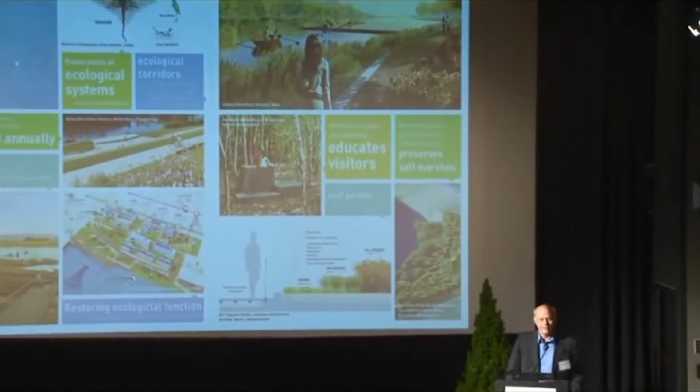Looking at climate, we work all over the world, so climate becomes an initial point of reference for us - how do we respond to the various climates within which we work, and what are appropriate solutions for those climates? Ecology, again, because the sites vary and the scale can be vast, several square kilometers down to a few hundred square meters. The issue becomes how does one deal as part of a broader context? We have this notion of always embracing that next level of context in the work.

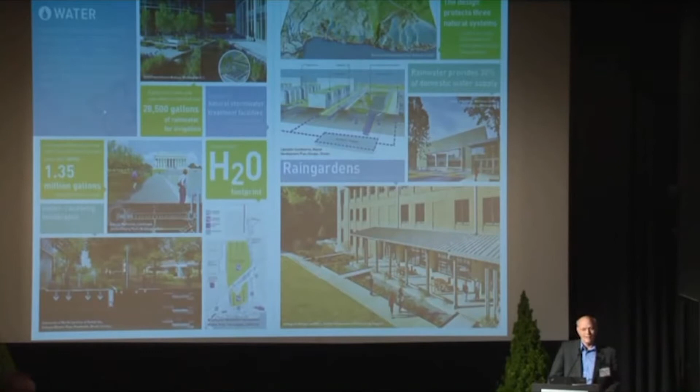Water - again, depending on where you're working, what are the water issues in the region? What are the key metrics one would look at? How does one produce a design that is appropriate for the water issues in that particular region?

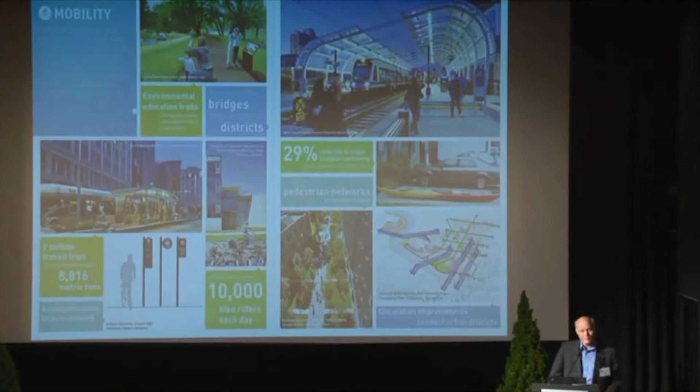Mobility - because we come from a planning background, we are dealing with transportation. We like to refer to transportation not just as moving cars around, but how does one walk, bike, use transit, and how does one even embrace the car? How does that function as a system, and what are some of the outcomes we seek to achieve? Focusing on the experience for people becomes part of the key initiative there.

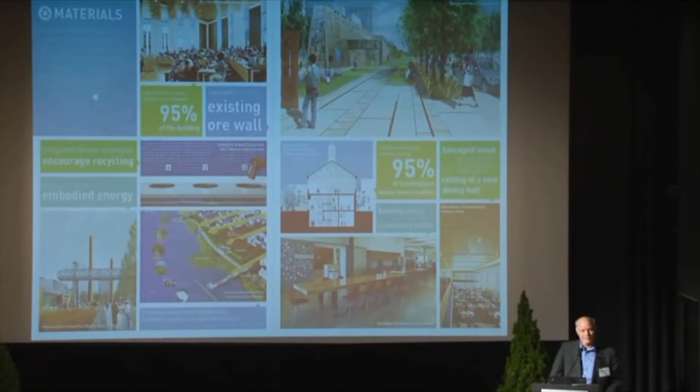Looking at materials - how do we source materials? Where do they come from? Are they appropriate for the region? Do they perform well in the climate? Do they perform well in an interiors project, which again we work at that scale as well. So we're trying to look at materials on a comprehensive basis.

And then finally, community - it's about people ultimately. So how do you create places for people, places that are culturally responsive? Again, looking at where you're designing, who you're designing for, and what might be their particular issues.

So how does one apply the framework? What I've shown you is the overview and a flash of some of the metrics that we've been trying to work with.

An example from a university environment—in many cases we work with urban universities. A university environment provides the opportunity to deal with many of the issues you deal with at the urban scale, but importantly, there's one owner.

So you're able to address these issues more comprehensively than perhaps you would at a city scale. The Sustainable Solutions Framework applied for an urban university might look something like this, where we begin with people. Who are we serving? How many of them are there? And what might be the impact on the environment?

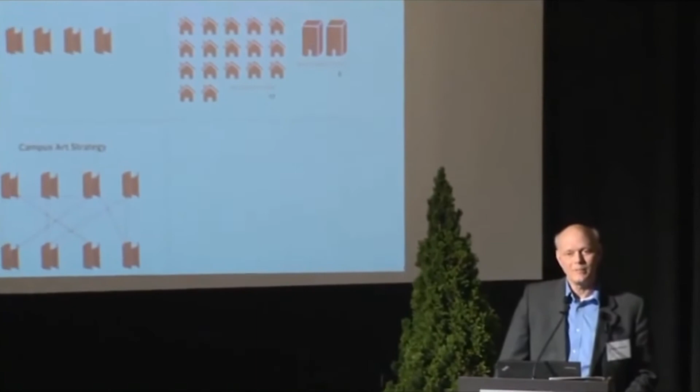What is the mission of that population? What are they trying to do as an institution? How does that impact the environment, and how does it impact the way they organize themselves? For example, if they're pushing research, that becomes a key initiative.

With many institutions, land use and athletics become an important consideration. Also place, tradition, history, and what sense of community they're trying to develop in that environment.

The issues you would expect us to get into are all the environmental factors we deal with in our work, whether land use, landscape, space implications, et cetera. In the framework we seek to develop a goal for each area, conduct appropriate analysis to inform how we look at these issues, and then set metrics for various time frames. Where are we today, and where do we hope to be in, say, 10 years' time?

So the element of time becomes a key consideration in how one looks to the future, and how one brings a population along through this process to help them understand that if they want to achieve their goals, they really have to think about the future.

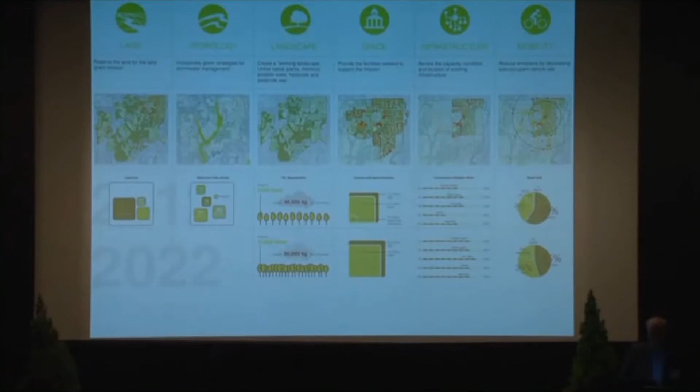We look at resource flows—everything from potable water to energy consumption, and increasingly, energy planning around emissions. Many institutions have signed commitments to reduce emissions, so what might that mean in terms of how they go about getting there?

Materials—how do they source and procure products? How do they source and procure building materials, and what is the environmental impact of that?

Recycling is a big initiative in many communities, but what do we need to be doing to plan for recycling, not only at the site level but operationally? How does that work within a community or even a campus environment?

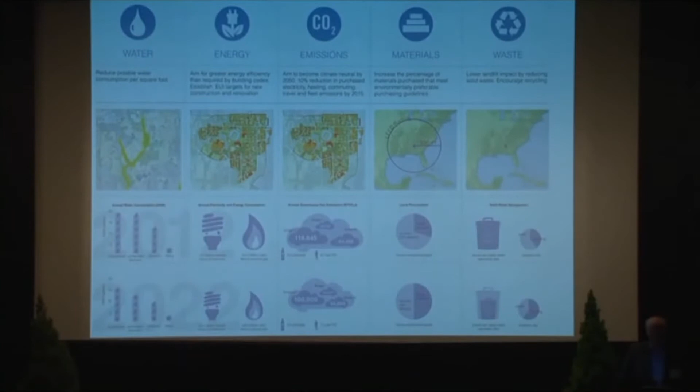And then finally, finances—how do we pay for all this? What are the operational issues one encounters? That can be a significant issue.

With institutions, research and research funding matter—research is a huge energy consumer on many campuses, so how do we think about that, and how do we think about research in maybe a different way?

And then partnerships, which applies to communities as well. What partnerships are necessary to create a solid community and a good quality of life—one that helps achieve some of the initiatives we heard about this morning, around cogeneration of energy, sharing of resources, et cetera.

So if we think about people, this is where it really all comes back to—we're designing for people and their patterns of activity, what they hope to do in these communities or environments. A key consideration we always begin with: who are we designing for, where do they live, and what impact might they have relative to their own commuting patterns?

So let's say for a campus environment where you're bringing thousands of people from some distance every day, the environmental impact can be significant. So what might be some of those considerations?

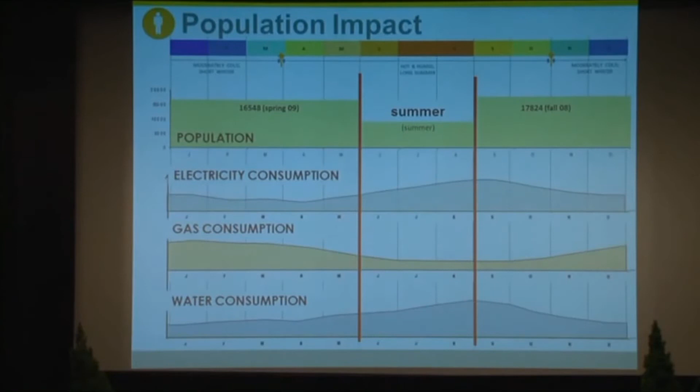And I don't mean no one—there are people there, but certainly these environments are built for much larger populations and are not functioning at that level. So it begins to suggest there may be an operational issue we'd want to think about relative to these environments, getting more out of them, being more efficient.

We also think about community, and we go through extensive mapping exercises where we look at what surrounds an institution, whether commercial or other cultural initiatives. How do we begin to create partnerships and opportunities for collaboration, and through a planning process, bring these people together so they see the potential for future engagement?

Now, some of the areas that we typically get into, as I think many of you would in your work, would be starting with climate. As I mentioned, we work all over the world, so we have to think about the issues of climate and how that influences the way you lay out a master plan. We've heard a lot about that today.

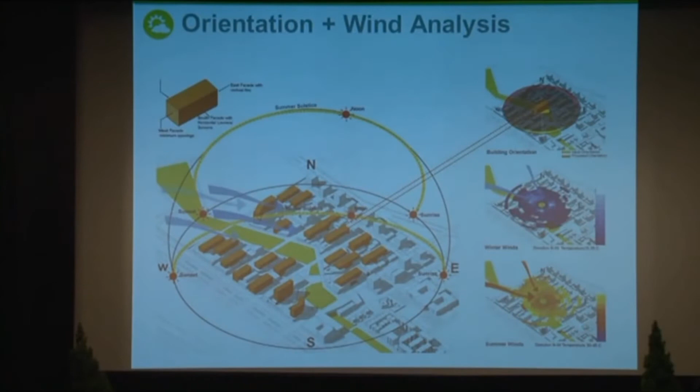Understanding orientation and wind analysis becomes part of our analytical process of how we arrange buildings relative to the region we're working in. But also building spacing for comfort and energy efficiency—what are the optimal dimensions for streets, for plazas, etc.? That's a key starting point in the analysis.

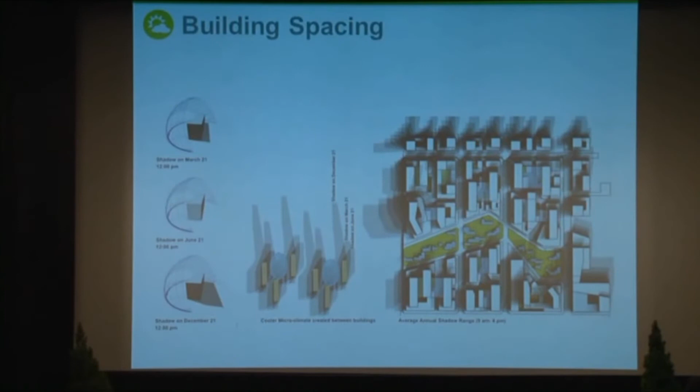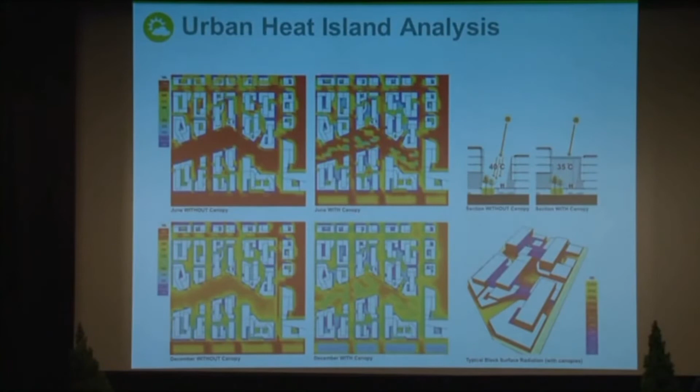As are urban heat islands, looking at the various temperatures and materials and how they perform relative to heat absorption in that particular region. So these types of analyses inform the way in which we begin to plan urban environments.

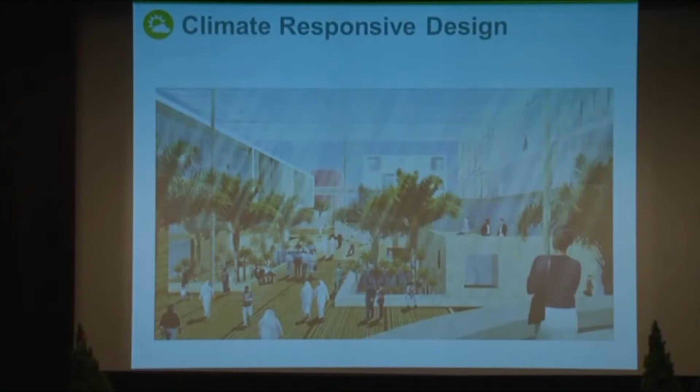And then finally, pushing into the buildings in a way that maybe hasn't always been the case with planning, but really understanding how you arrange and configure buildings such that you get climates and microclimates, places that are comfortable for people, and decrease the energy demand on a building. Ultimately leading to many examples, like we've seen this morning, of how one might design in a very hot climate—in this case, Abu Dhabi.

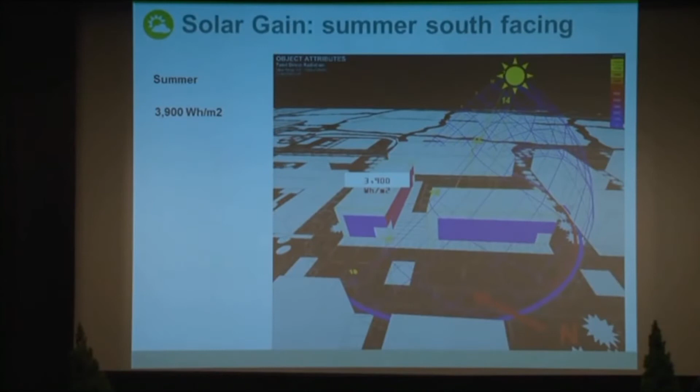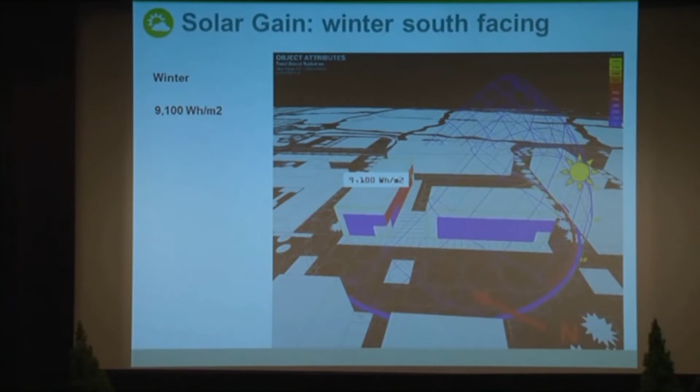We also work in regions where, having worked with a number of institutions and cities, they say orientation doesn't really matter. So we try to use analytical methods to help people understand, yes, it does matter—it matters on your building, looking at the various seasons. These methods are part of the process of educating a group you're working with, helping them understand why these things collectively matter, and the integration needed in developing a plan that's responsive to the climate, the culture, and the region.

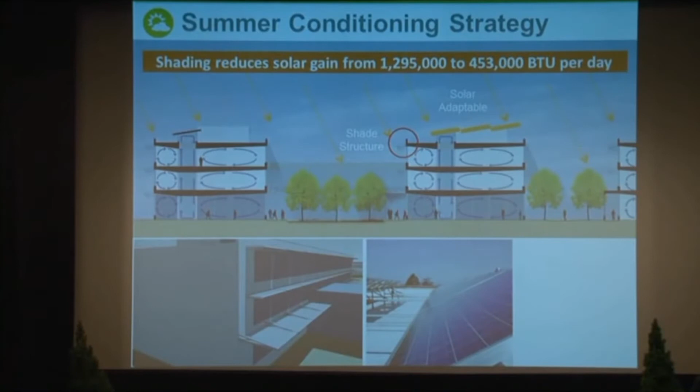That even goes down to how we might begin to notionally arrange buildings, knowing the building types we might be working with, and how we might arrange them on the site—not only relative to energy, but also when rainwater collection and stormwater management becomes part of the conversation with the client groups we engage.

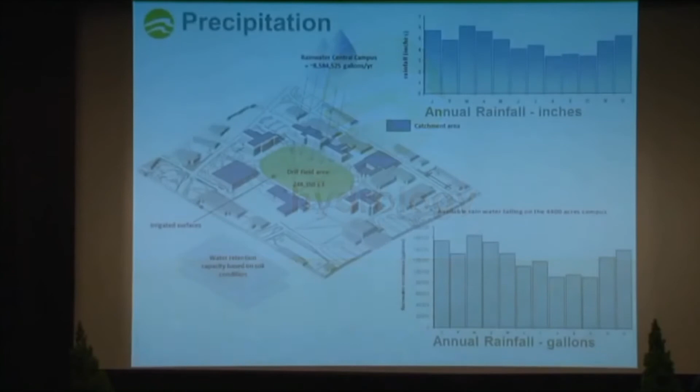Now, stormwater management—because we come from a landscape background, that's another area where we put a lot of emphasis and work, not only looking at site-level management, but also thinking more broadly about a region and how one would design and use best management practices on a particular project.

It always begins with an analysis of how much rain a particular site receives, what kind of landscape it would support, and what considerations we need to think about relative to managing that rainwater and even harvesting it for particular uses.

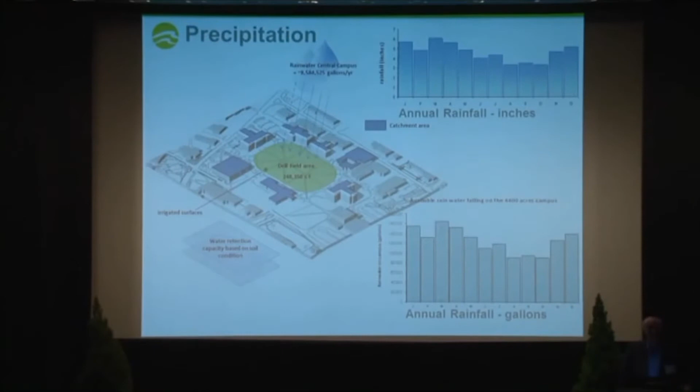This also gets us into GIS analysis, looking at topography, but also thinking about the way open space structures work in a particular community, how that relates to water, pedestrian movement, and even organization of land and landscape.

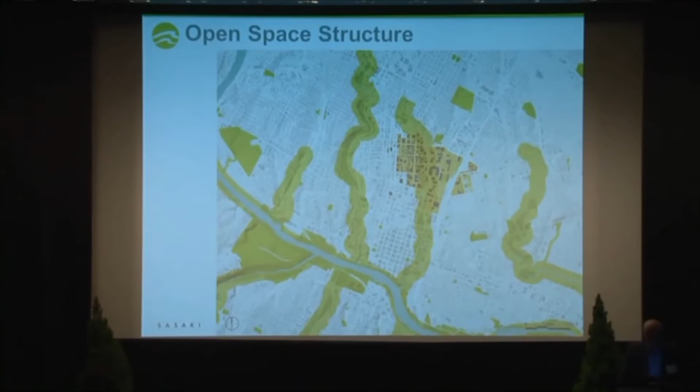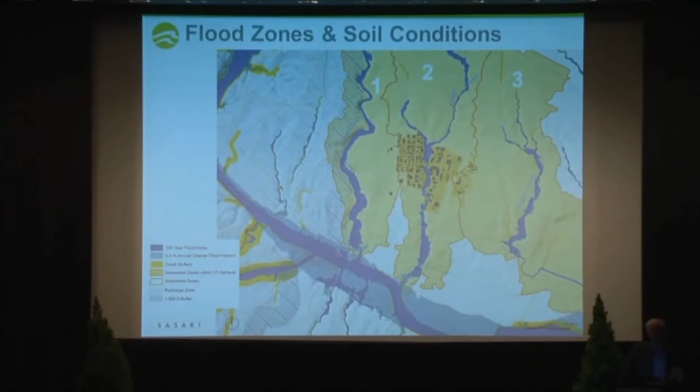So soil conditions become part of the analysis, understanding what will happen with water once it potentially infiltrates the soil, how it flows, and how it impacts the various sites you might be addressing in your work.

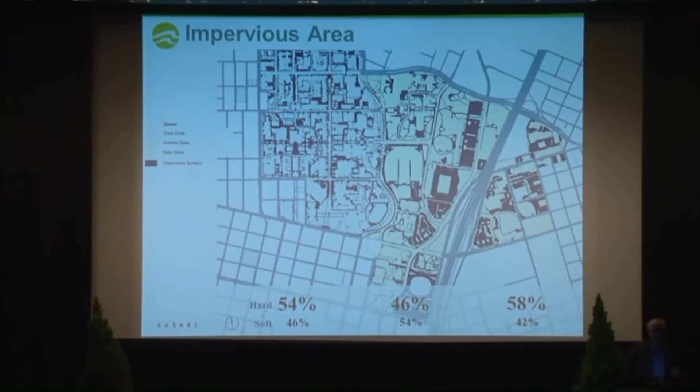Impervious area, again, not something that would have been calculated, say, 20 years ago in a master plan, but now part of the work—trying to understand what impact we're having relative to the hardscapes we're creating in a campus environment. How do you measure that? What are the considerations, and how do we make this work as a system? How do we use best management practices that decrease the impact of an impervious surface area?

As we think about the built environment, we're looking at land use, landscape, space, infrastructure, mobility. I could go into a lot of detail on all of these, but I'm going to touch on landscape in particular, where we try to develop what we call a working landscape—one that not only provides the aesthetic quality you'd want in an environment, but also functions in that climate, in that region.

And if we're going to create a landscape in an area that doesn't have much water, how do we then utilize water to the best benefit—to help promote tree growth and use water wisely? That begins with an understanding of landscape typology and what maintenance practices might be needed, and how much irrigation it might take.

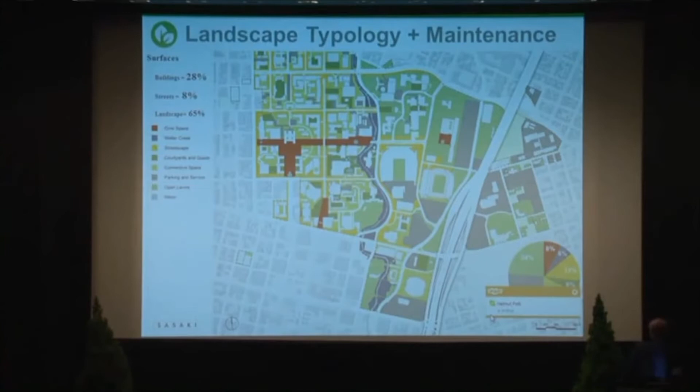That certainly requires an understanding of the region and what will work in each region, but also the fossil fuel component associated with landscape maintenance. One of the statistics I've heard is every day in this country we mow about an area the size of the state of New York. So the environmental impact of something like that is tremendous. If we can decrease the amount of energy input into landscape, it's certainly an important consideration.

We do work all over the country, and in this case, this is Austin, Texas, where at the University of Texas, we really looked at shade, not only shade contributed by buildings, but also by landscape. So what is the tree cover doing in an environment such as Austin?

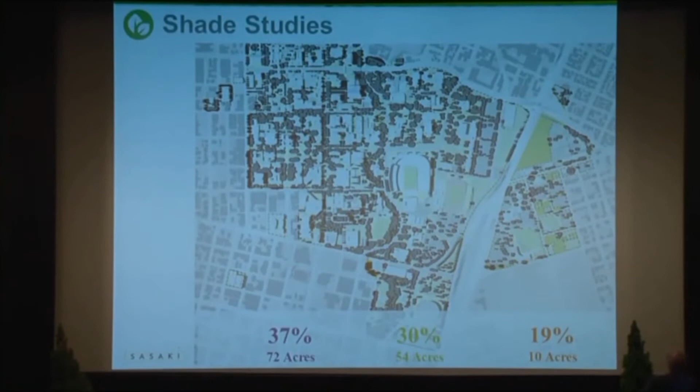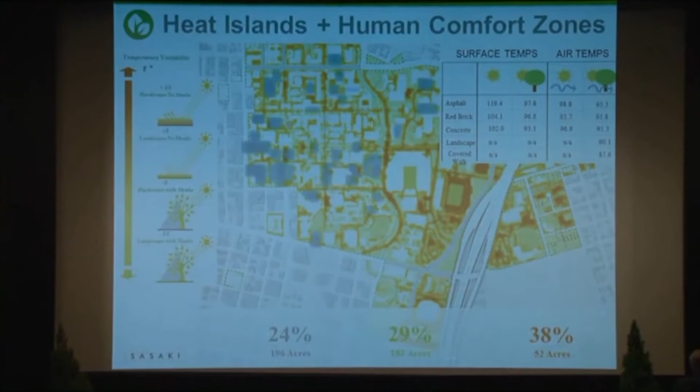In this case, we did an extensive heat island analysis at University of Texas, looking at the various surface materials, taking temperature readings, trying to map out the human comfort zones. As you would expect in an environment such as Austin, the most comfortable environments were those that were most shaded, and so the live oak trees become an important part of the human comfort strategy. And so strategic tree placement becomes part of this overall master planning effort as well.

So that leads us to shade strategies. I think we've heard a lot about building placement today and the importance of that relative to shade, but there's also a landscape component to that as well. If we look at a campus environment throughout the day and the contribution of shade throughout the day, it really begins to inform how we think of where trees are placed relative to movement, where people are walking, relative to building placement. Certainly in the southern parts of this country, if you can utilize trees on west facades, east facades, it can significantly reduce air conditioning demand. So it's more than just putting trees there for aesthetic value—there's a functional quality to it that we seek to embrace in the work as well.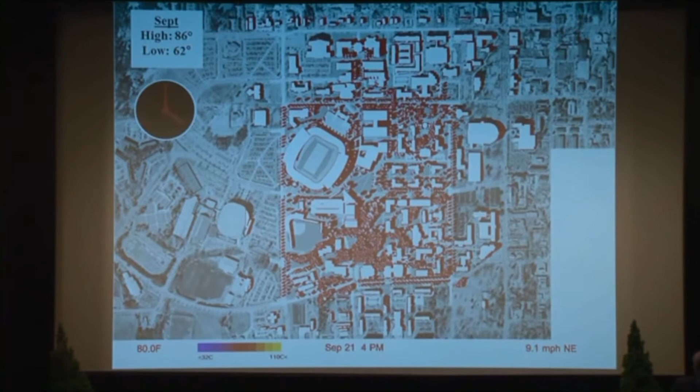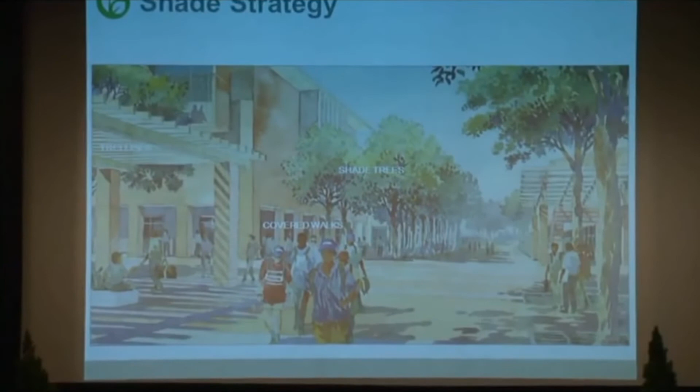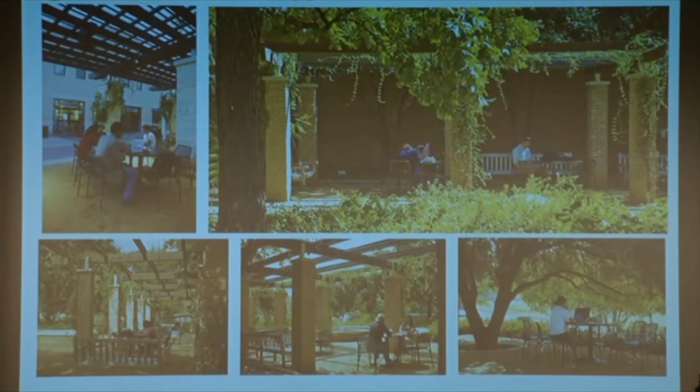So at the master planning level, there's a shade analysis, certainly in the southern regions of this country, where I tend to do a lot of work. How do we introduce elements in the landscape that might be there initially—trellises, things of that nature—that help provide outdoor comfort, but over time tree growth will help supplement what those structures can provide initially. So this is an example, again, from Austin, Texas, where we've sought to extend the outdoor environment through simple measures such as these. It really extends the outdoor life, and we heard a bit about that today. It's really this connection to the outdoors and how do we create comfortable environments in a thoughtful way. So again, it's more than just putting trees and shrubs in.

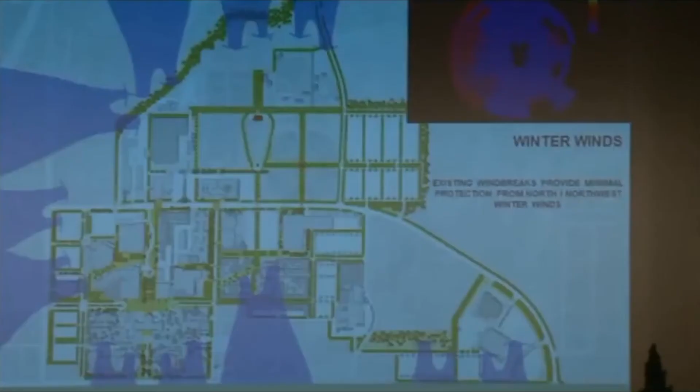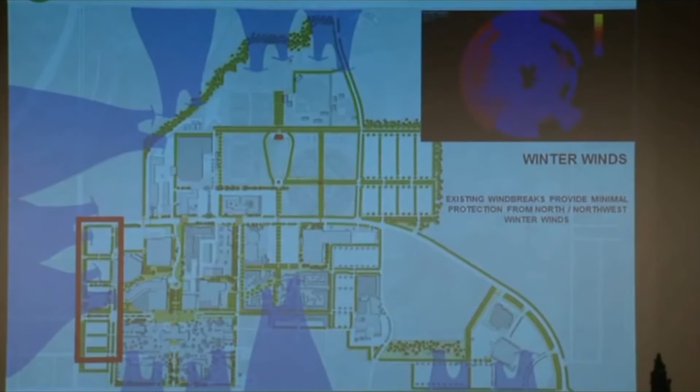We work in many areas of the country where wind is a considerable issue, and obviously building placement is important to that discussion, but landscape can play a role here too. This happens to be an example from West Texas, which I have to say is one of the windiest places I've ever been, where we began to look at how windbreaks used in an urban environment could really help mitigate wind. What you see here on the west side of this particular institution is a wind modeling analysis we conducted, with the red areas being the most significant wind, and you can see just behind the tree layer a significant reduction in wind speed.

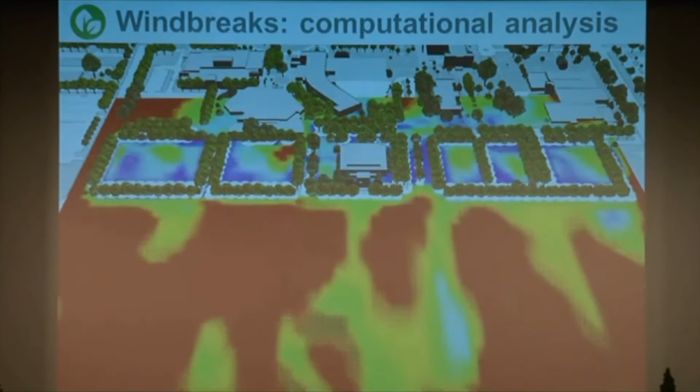This is a strategy used in many parts of the U.S. historically, but has somewhat been forgotten. So we look for opportunities to do things of this nature that complement what we're doing in the urban environment.

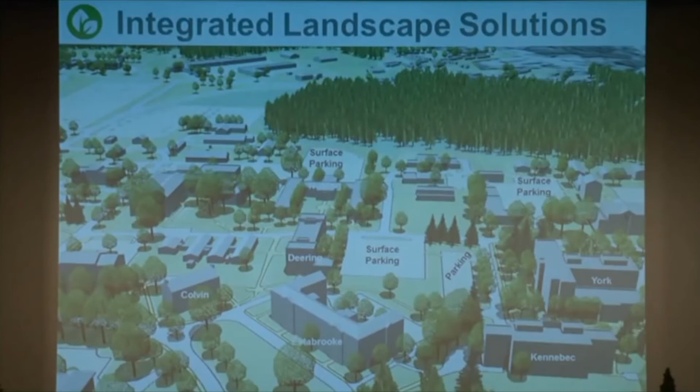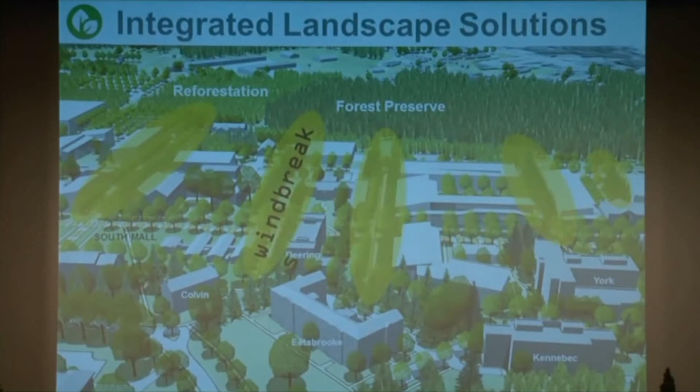A case a little closer to New England is at University of Maine, where we sought to introduce, in the campus environment, a series of windbreaks that not only were about pedestrian movement and stormwater management, but also helped mitigate some of the significant wind issues on this campus. The windbreaks were introduced and tailored such that we began to create these protected zones in association with the proposed buildings, thinking about how this campus environment would function year-round.

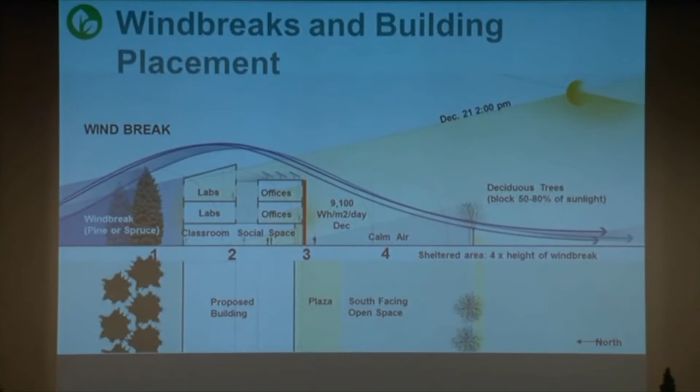With a windbreak, depending on its height, you can get a calming area of up to four times that height, looking at species such as evergreens that help mitigate wind for human comfort, but also relative to building placement. It can help decrease infiltration on the building and create a more sheltered environment for the placement of new buildings. In this case, the building and the windbreak collectively protect a zone on the south side that would help extend the outdoor season for this particular building.

We also look at water management and the landscape. In this particular case, there's several things going on. It was a pedestrianization of a street, but also an opportunity to not only improve the aesthetics, but also deal with stormwater management as part of that strategy. So an integrated solution that would help address many levels of what we were seeking to do in this project.

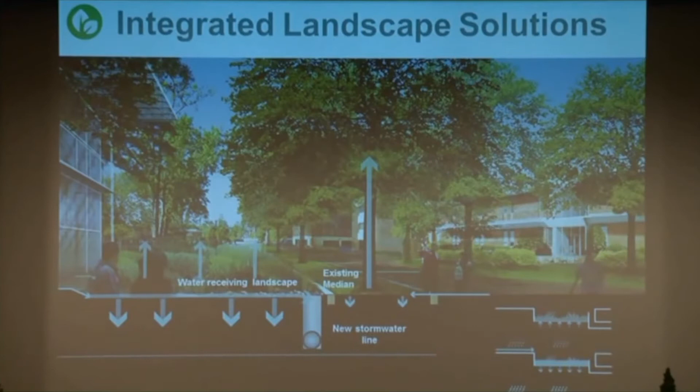So it's how these things begin to come together in what we call joined-up thinking. It's more than coordination. Coordination implies you would think to do that. Oftentimes, there are things you can join up and link that you wouldn't, unless you went through analysis, even consider joining together. So this leads to integrated solutions not only at the urban level, but in using existing infrastructure, which I think we've heard several times today.

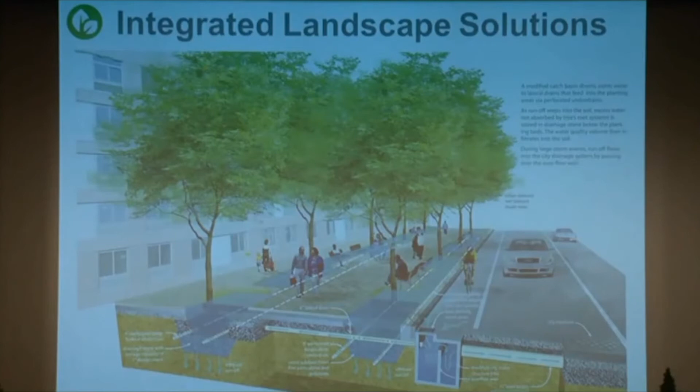I think like Germany, we've built a lot in North America. So how do we adapt what we've done to really begin to think in new ways as we do renovation and deal with deferred maintenance and things of that nature?

With regard to energy production in the landscape, another thing we often look for in established environments is how can established open spaces maybe become geothermal fields? How could they in fact be part of energy production for buildings in the surrounding context? So there might be opportunities depending on where you are, depending on soil temperature and the technologies in use. That could be a consideration as well.

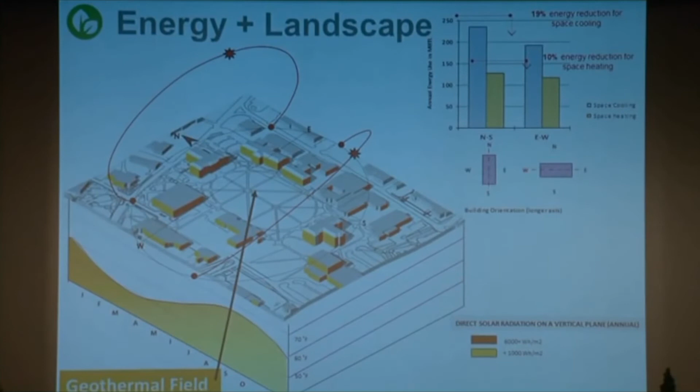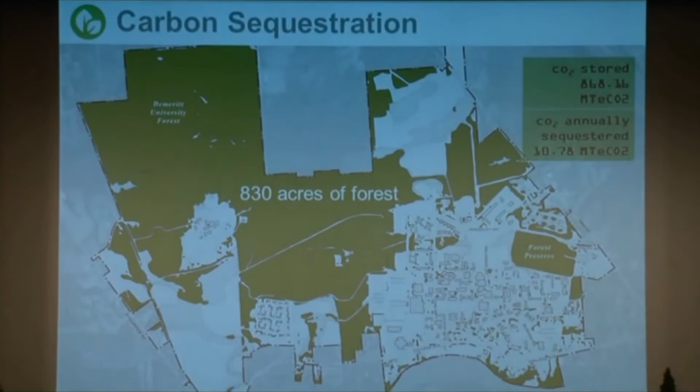Now, I often hear from clients, oh, we've got 830 acres of forest, we're all set. We don't have any emissions now because of that. Well, even if you were to take it—and again, this is at University of New Hampshire—it doesn't quite work the way I think people believe. If it were to work, only about 1.5% of their emissions would be sequestered by their forest. But I think a lot of people out there just assume we'll plant 5 or 6 trees and we'll be all set.

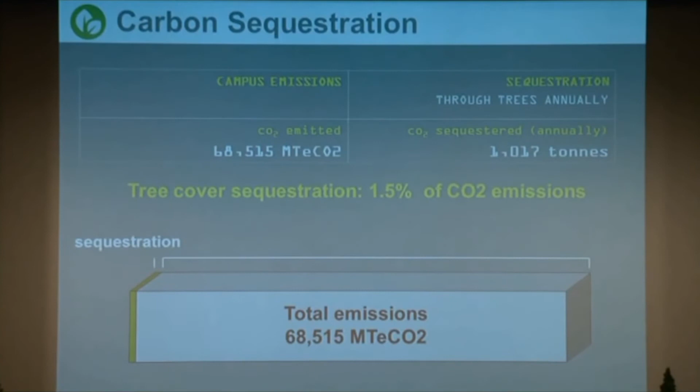And so that is one of the myth busters. Now, it's not to say you should not plant trees. It's just that the opportunity is not as great as some people would tend to think.

Now, we're also dealing with space and looking at legacy. As has been mentioned several times, we've built a lot. What do we do with it? It's the legacy of that space that becomes important. And the way we like to think about this is space and people lead to energy consumption in a building and an environment, which leads to emissions and costs.

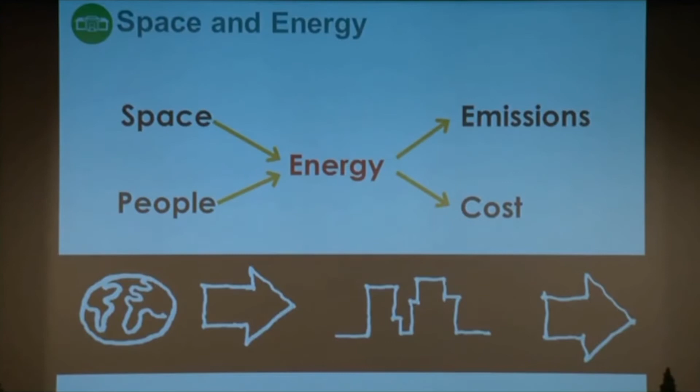Now, whether we're here or not, this building is consuming energy—certainly conventional buildings. So you have to have a new accounting procedure here. I think certainly in a university environment, an institutional environment, this notion of the connection between space and energy is one that many institutions are certainly beginning to deal with. So helping them understand energy use intensity in a multi-building situation.

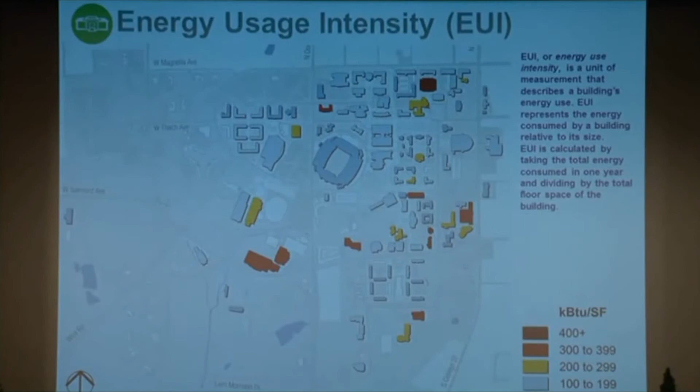This applies to an urban environment, but in this case, most of the red buildings, the most intense, are lab buildings or athletic facilities that tend to consume a lot of energy. So are there ways of operating, ways of constructing and renovating that would improve that situation? That becomes the question. Also thinking about new construction and renovation.

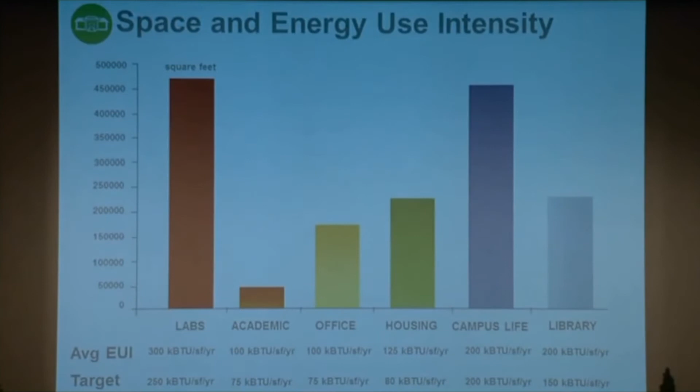If we're adding, in this case, a lot of research labs, the energy implication of that—unless we take some initiative and set a target for ourselves and a new way of thinking—our energy consumption could increase greatly. So understanding the impacts of the various types of space that you will be adding or building collectively becomes part of a planning process as well.

I've mentioned mobility, and this becomes a key thing, certainly as we think about landscape, context, urban environments, understanding how certainly vehicular traffic works, and this leads to a lot of coordination with transportation planning and vehicle flow.

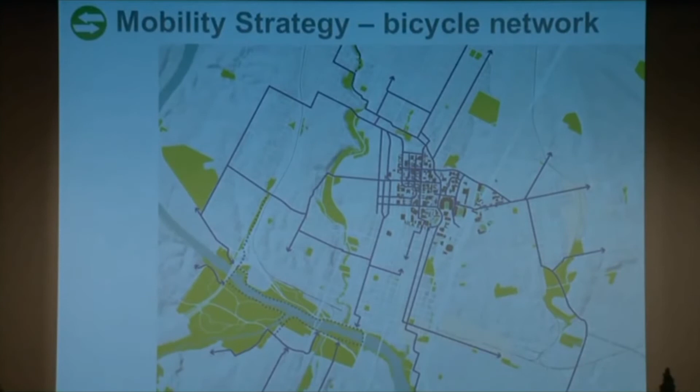But increasingly, bicycle use—I think it's dramatic what is happening in the U.S. The amount of bicycle use I'm seeing is incredible. But as a culture, I don't think we know how to deal with it quite yet. So how does one integrate bike movement into a city environment? How do you park bicycles? How do you do all those things? It sounds simple, but in an environment such as a university campus where you're drawing a lot of bikes, it becomes a significant consideration.

And then transit planning. In this case, we try very much to coordinate it with land use planning. Where are we bringing these people?

How can we create nodes or points where we're supporting business, so you're not just delivering transit services, but really thinking about how you create nodes where people have services and amenities, supporting business opportunity in the urban environment. We have this notion of mobility space, the corridors you travel through, and those need to be more than just streets.

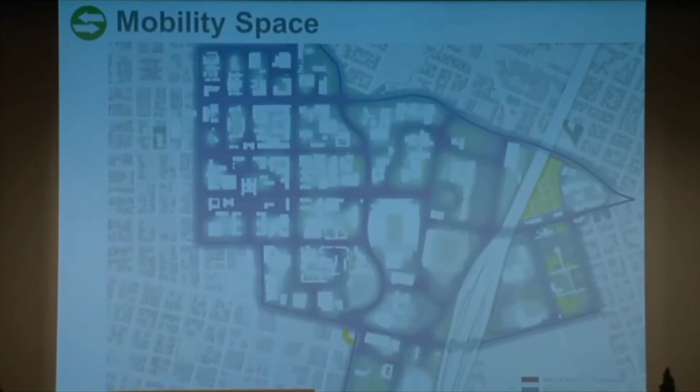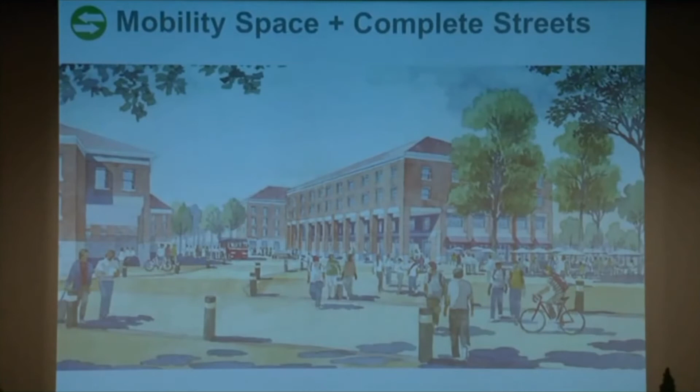We have to think about all the modes of transportation, completing a street environment that considers pedestrian movement, bicycle movement, transit, et cetera. How does all that function as a system, and how is it coordinated? That leads to the character of the environment. You have to help people understand what that might mean, especially in parts of this country where auto use is predominant and they don't understand how this could function in a pleasing and acceptable way.

Modal split becomes part of the discussion, trying to move away from as much auto traffic as we have today and toward an environment where we're balancing things. It's more of a comprehensive mobility strategy. So we've started collecting metrics in our work through a new bus line service in Cleveland, thinking about what that might mean in terms of its environmental implication by introducing this BRT corridor through the city.

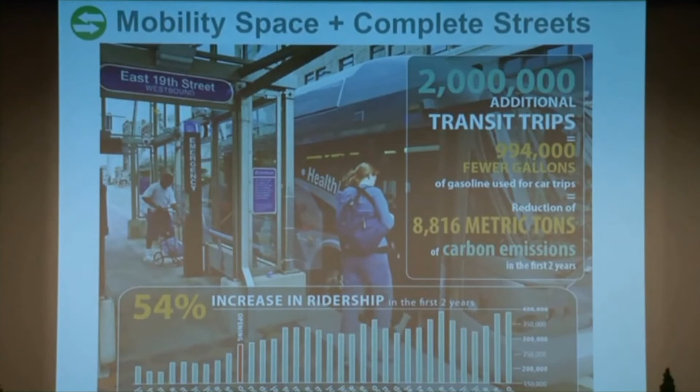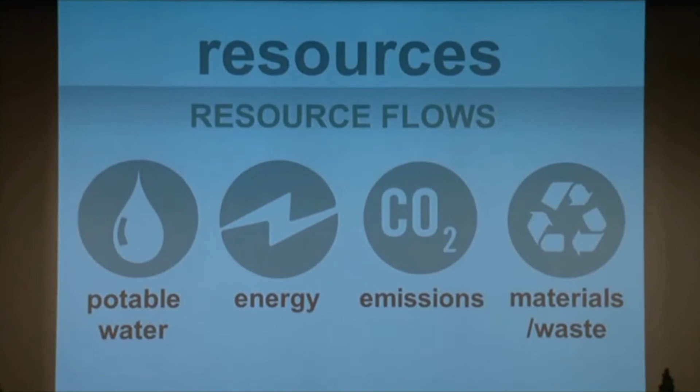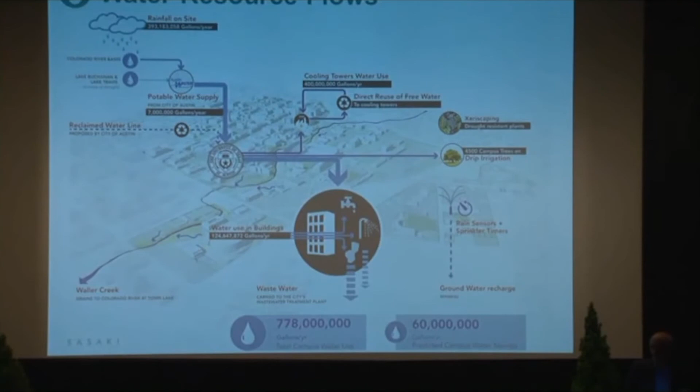In the resource flow areas, a lot of this is trying to help people understand the implications of functioning and living in an urban environment in a community. I think a lot of people have no idea where their water comes from - they just know it comes out of the tap. They don't know the whole process of getting it to them. So what we try to do is help them understand the flow, the sequence, and the issues with how they're consuming water, not only in buildings and infrastructure, but also relative to landscapes. How might we do better?

One thing we like to do is relate it to something tangible - okay, in this particular campus environment, you consume 2 Olympic swimming pools a day of water. That's quite a bit of water, but it's something people can begin to understand.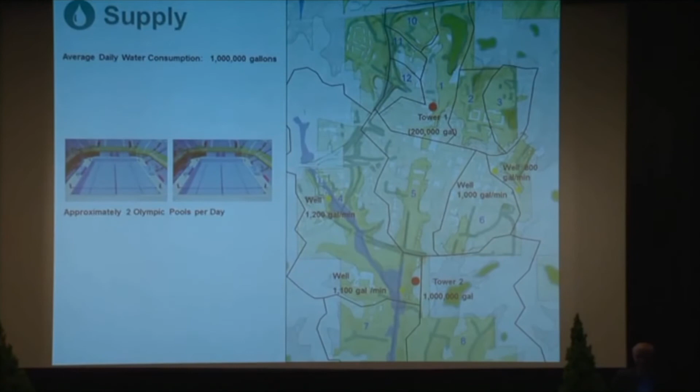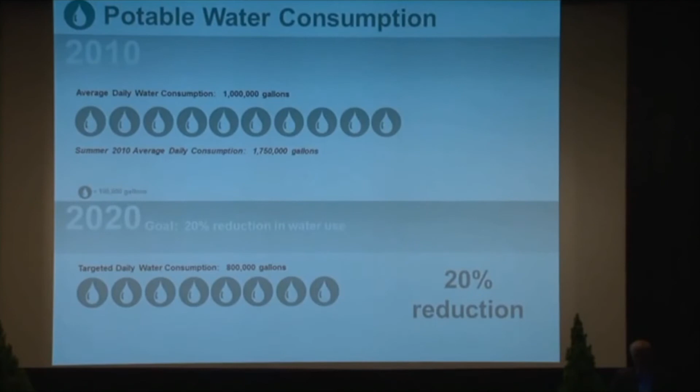If we're bringing people through a planning process and education process, helping these individuals understand the metrics becomes key. So we look not only at what you're consuming today, but where do you want to be - often they're setting targets. Where do they want to be in 10 years' time? Obviously there are various strategies for getting there, but this is the sort of stuff that I don't think communities necessarily understand.

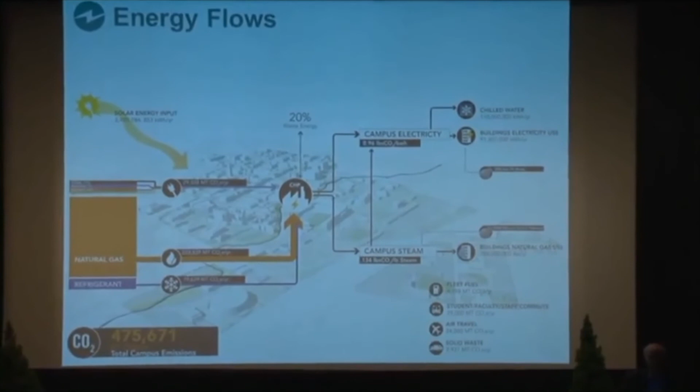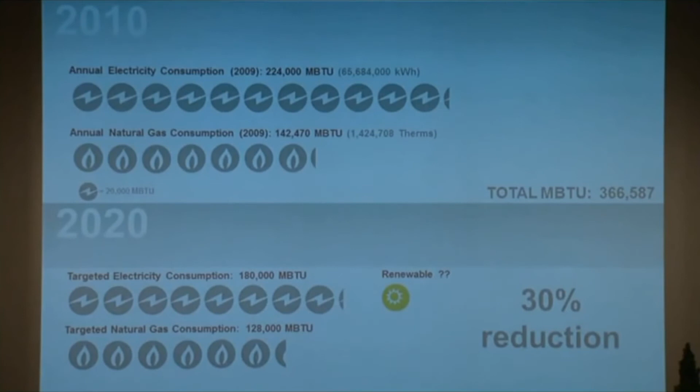Energy is a key area as well. What are the flows of energy, and what are the various sources of energy in the campus environment? How might one think about that differently? Looking at where you are today, the various sources people are dealing with, and their goals and what that means - this whole element of time becomes an important part of the conversation.

As I mentioned, CO2 emissions - certainly as we work with many urban institutions that have signed commitments to reduce their levels of CO2 emissions as a result of the President's Climate Commitment, an organization here in North America where institutions are signing up to set dates for target climate neutrality.

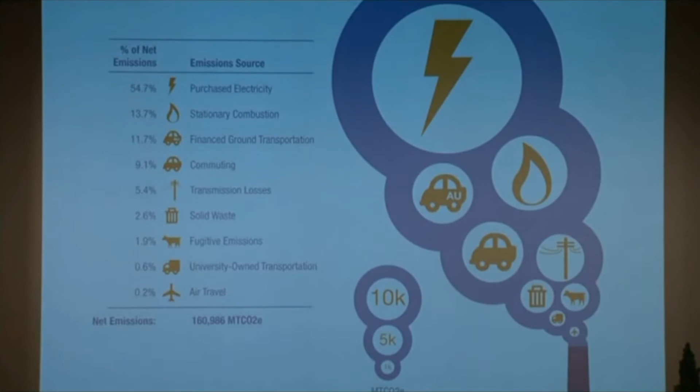One, understanding the sources and scopes of emissions and what the various sources are. In many cases it will be purchased electricity, certainly in a southern institution. As you move further north, it's a little different. Comparing some of the data we've collected over the years, a land-grant university in the northern U.S. had most of its CO2 emissions from on-campus combustion for heating. As you move south, where they're air conditioning more, it becomes more of an electrical load. So the grid you're a part of becomes an important consideration.

As you look at commuter campuses, it's different - obviously more people are commuting, there's smaller square footage, they're getting more use of their space. So the energy profile of these various institutions changes dramatically as you move across the country.

One issue we have is we can plan all we want for bicycle use and walking and transit, but the fleet in the U.S. - well, we're number one, that's for sure, in grams of CO2 per kilometer. That will hopefully change over time, but just what we drive has a tremendous impact as we try to figure this problem out. So over time, hopefully we'll make significant improvements here.

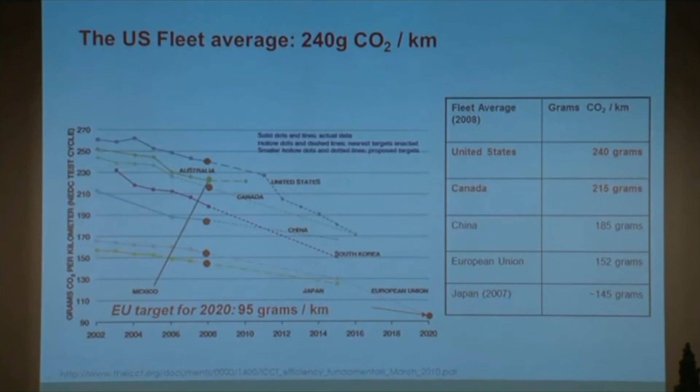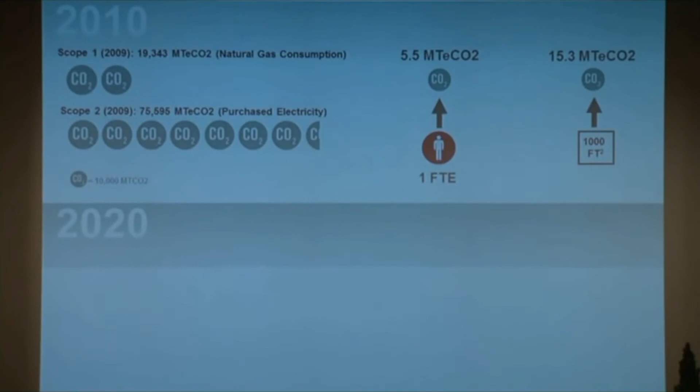We also work to help people understand what emissions mean broadly, but what does it mean at the per capita level, or the FTE level in the case of an institution, or even at the square footage level. These are all metrics being used to compare various institutions, and again, where do they want to be in some years' time?

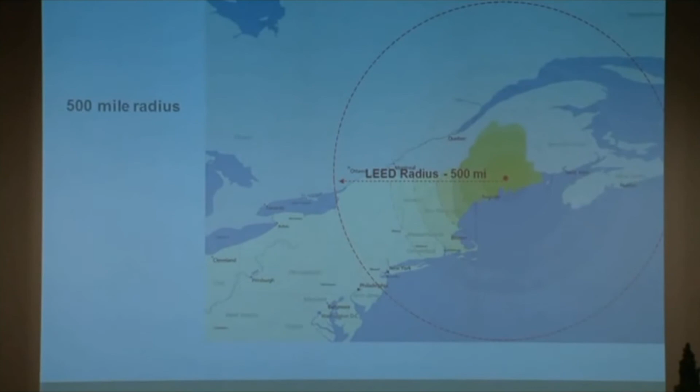Also, materials and waste—there are many things to deal with here, but a lot of institutions are taking quite seriously the LEED radius: where are they getting their materials? This can certainly be true for urban environments. What are your opportunities within that region to get the materials you need for construction? And then waste management, a big issue on many campuses and certainly in many cities as well.

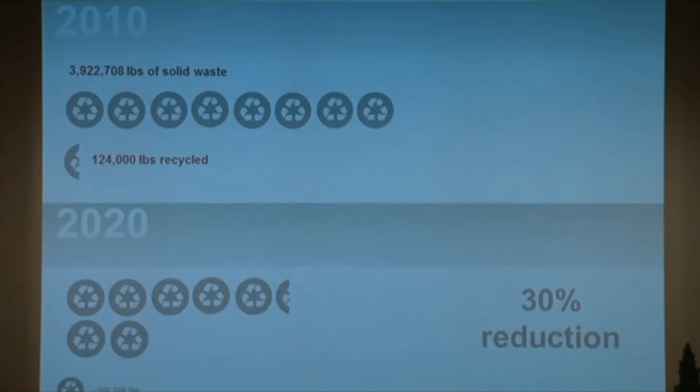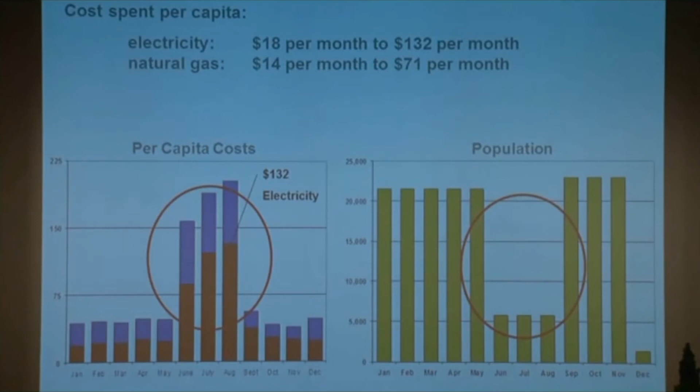Finally, operational costs and economic development. These are areas where we've started mapping out, like we saw in one of the initial slides, the impact of not operating a facility or an environment—an urban environment or a campus environment—to its full potential. The cost of operations can increase dramatically in those months where you just don't have the population distributed. So the patterns and flow of people become important as we consider these initiatives.

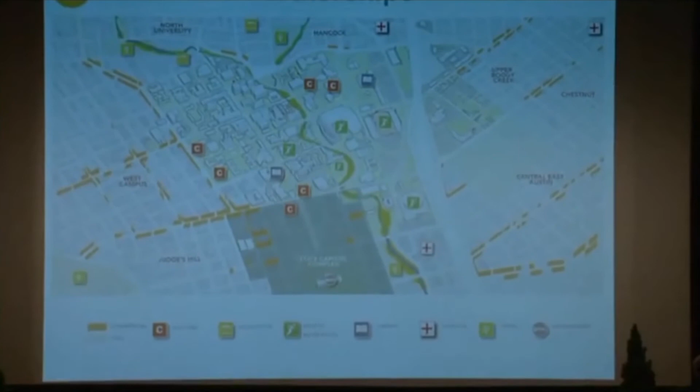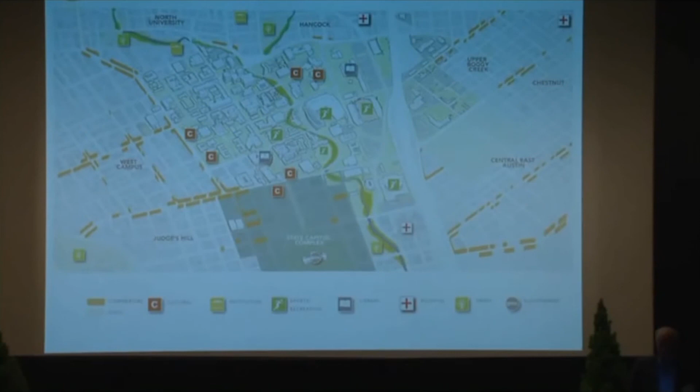And then finally, economic development—because we're taking this to the planning level, we really want to understand how various elements of the urban environment can be made to work such that you're supporting business, supporting community development, supporting other initiatives. This leads to a mapping exercise where we try to understand the location and the various population levels and relate this back to transit. How do we deliver people where we can not only support transit and make their experience better, but also support the business community in the process?

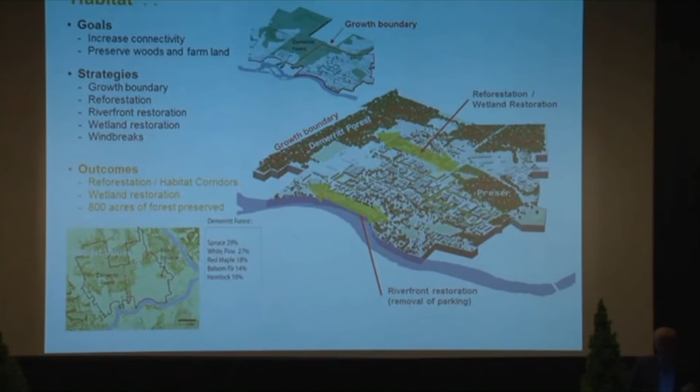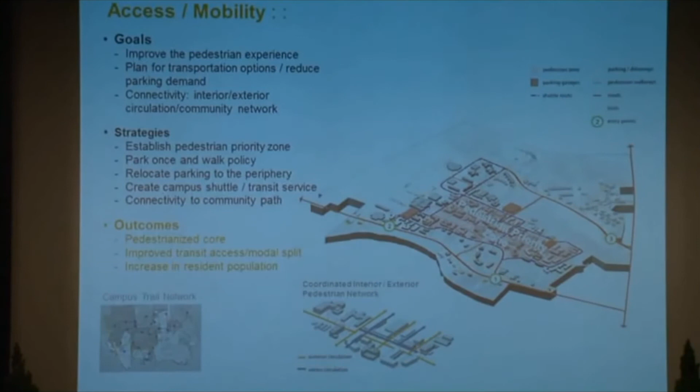Just briefly, one of the case studies, the University of Maine—I'm going to go through a few ways we're trying to help people understand graphically the comprehensive nature of what we do: dealing with habitats, the way we address water resources comprehensively, access and mobility in a comprehensive manner, and then energy and emissions, dealing with those key areas in the planning process.

Also helping them think of land use differently, and this is by policy. You think about what can we feasibly walk in an environment, where do we have infrastructure investment, and how through policy can we begin to focus inward investment rather than continued sprawl? Use what you have better and focus the investment into areas where you know you can really make a difference. So policies such as growth boundaries become important.

So thank you—I know I covered a lot of material, but thank you for your opportunity.

When Sasaki is helping a client set a baseline or a target for carbon emissions or water reduction, what is a good metric that you use? Are you looking at what other campuses are doing, or at state requirements—like you showed 30% up there? A lot of people just pull 20% out of the air. What's your philosophy? It varies greatly. Some states are setting targets—if you're working with certain states, they will, through policy and municipal agreements, have set targets, and that can vary. But I think you have to be careful in the comparisons for reasons noted.

It varies greatly across the country—the energy sources, what you're doing with energy, whether you're air conditioning or heating. So you have to take all that on board and create tailored solutions for that particular environment and what they're able to achieve. I think one of the big issues we face is just the cultural differences in responding to these important issues. It varies greatly, so in our minds you really have to look at the location and what you're able to achieve there.